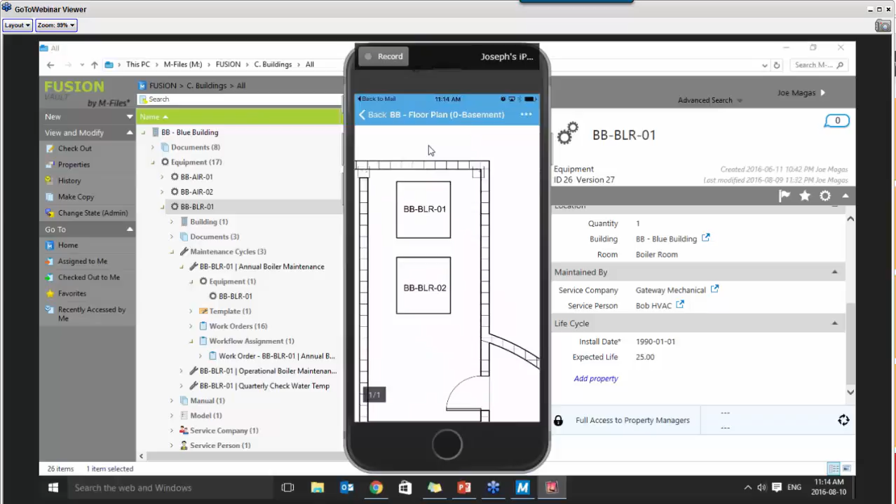We'll just take a look at this floor plan. We're going to look at this floor plan a couple different times. We can actually zoom in here, and there we go. So there's no question as to which unit is going to be supported. We can see the unit right there in the top of the building. The value of having all of this data available is that Bob HVAC has the information he needs to get the job done.

If we were to look in all views, just to take a little step aside, and we were to flip over to equipment, what we'll notice is these are the 4 pieces of equipment that Bob HVAC supports. So he has a listing of these, and as work orders get created, they will automatically be associated. Now we're just going to go back to our home. We can see that Bob, yes, in fact, does have one item assigned to him. We're going to click here on the work order.

If needed, a file could be added, for example, a picture, if some issue was there. But for the most part, this annual maintenance went very well. So I'm going to click up there. Oops, my apologies. I clicked on the wrong button. I'm going to click on Mark Completed, and I'm going to say, Done. All was well.

So now, within a few moments, this work order will be cleared off of Bob's desk. Sometimes it just takes a moment to cycle through that. We'll just give it another second here. We'll click on Assigned. There, all views. And we can see that, yes, in fact, this task is no longer assigned. It has been completed.

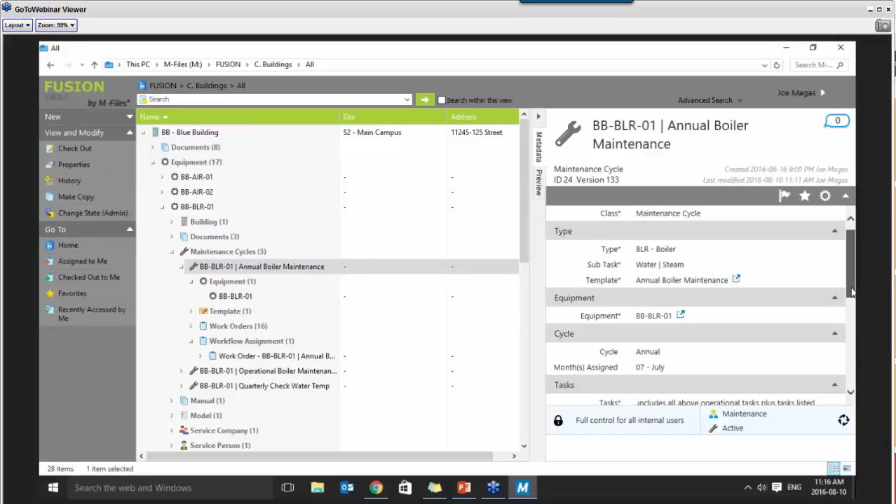So now if we were to go back to our equipment, find our equipment, and then find our maintenance workflow, we will find that the work order has been implemented. We'll just find this a different way to make it a little clearer.

Let's go back to our equipment, go here, maintenance cycle. We can find that this work order is now associated as a completed work order with the unit. Note the date has been updated to 2017. Because this is an annual task that needed to be completed, now it's been rescheduled for next July.

So full accountability and full traceability off of the fine work of Bob HVAC. That was the benefit or the application of this technology from the maintenance person's point of view. It allows him to perform his tasks with all the information he needs to get it done. If there's an issue, he has access to photographs and documentation that'll help him through that particular problem.

Now let's switch gears over to the property manager. The property manager in this case we can think of as the quarterback. He's responsible for a lot of different maintenance on a lot of different equipment, and he has to keep all these balls in the air without dropping.

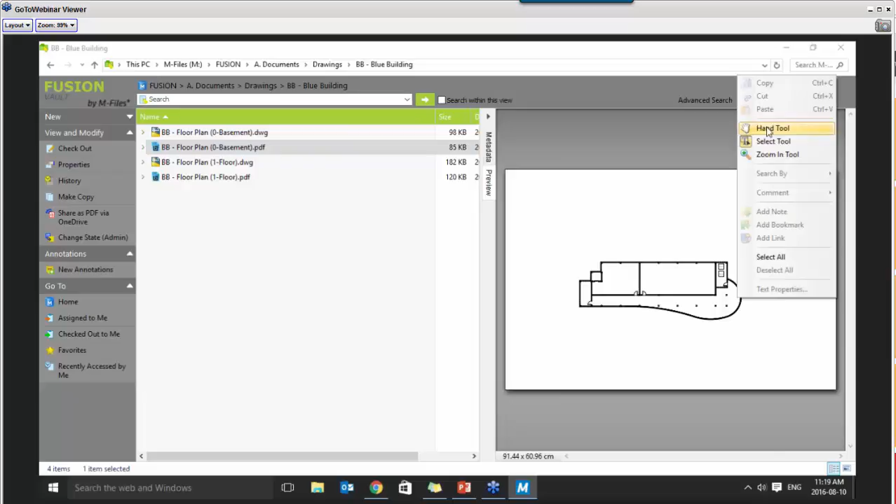He could link to the same floor plan, do a preview, and we can see he's able to locate this because the equipment's associated with it. Once he's in here, he can map it, he can actually look it up in reverse. We'll use our zooming tool here, go there. Now if I were to click on here, we have a hyperlink.

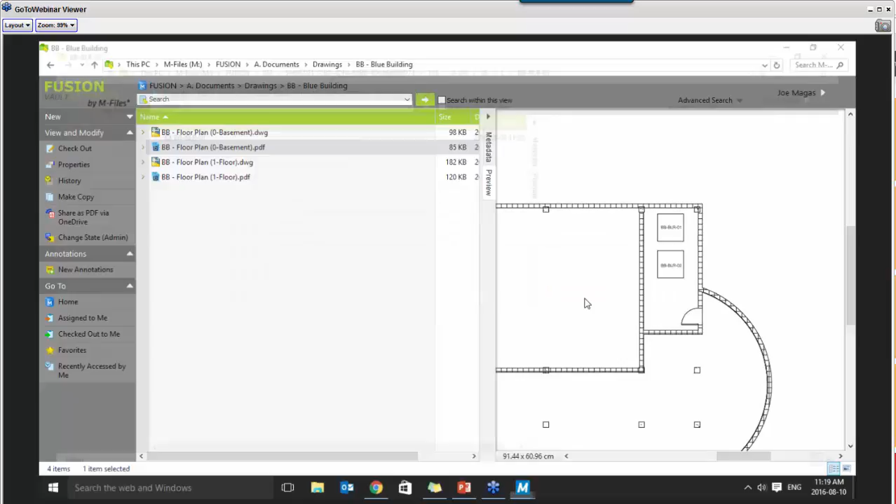This hyperlink will take you to the piece of equipment in question, doing a reverse lookup from the floor plan. Click on there, and there we go. Now from the floor plan, he is easily able to expand that, see the different maintenance cycles involved, the manual, who the service company is, service work, and the completed work orders for that. So his ability to find information, even if he's not in the building all the time, is greatly enhanced if he has this information stored.

Now let's talk a little bit more about these maintenance cycles, because that would be a key component of the work of our property manager. What we're going to do is take a look. If we look in our views, we can break up these maintenance cycles. We can say show me them by building, and this will show me all the maintenance cycles on that building. As well, we can say show me by building, and then by equipment.

So the dynamic nature of the folders in the M-Files platform is extraordinary. It allows us to query the information in a very specific way. Here are the maintenance cycles that are due in July for all of the buildings. Having the ability to navigate through this information, even through these simple views, is a real game changer for the property manager who needs to manage all these different pieces moving in his buildings.

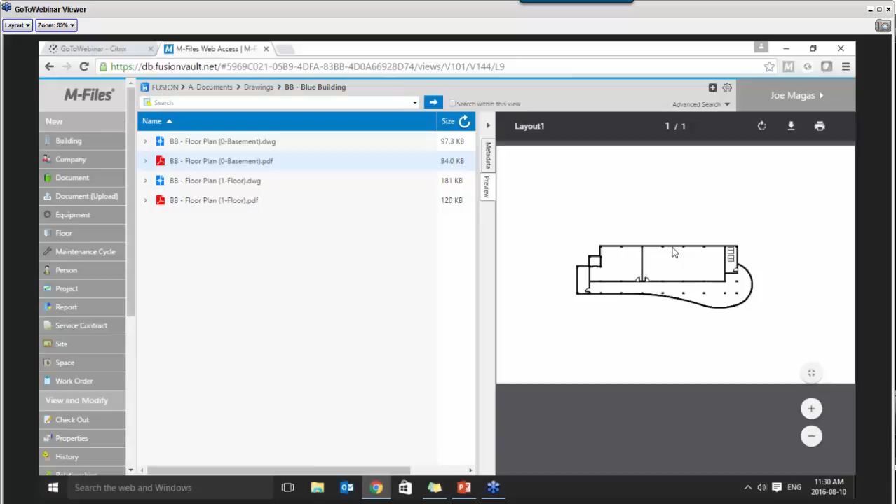Keep in mind we're still on the web version here, so it's very nice interaction. We're just going to go into Documents and Drawings, and we're going to find that floor plan. We had looked at this floor plan previously in our example. This is another floor plan here.

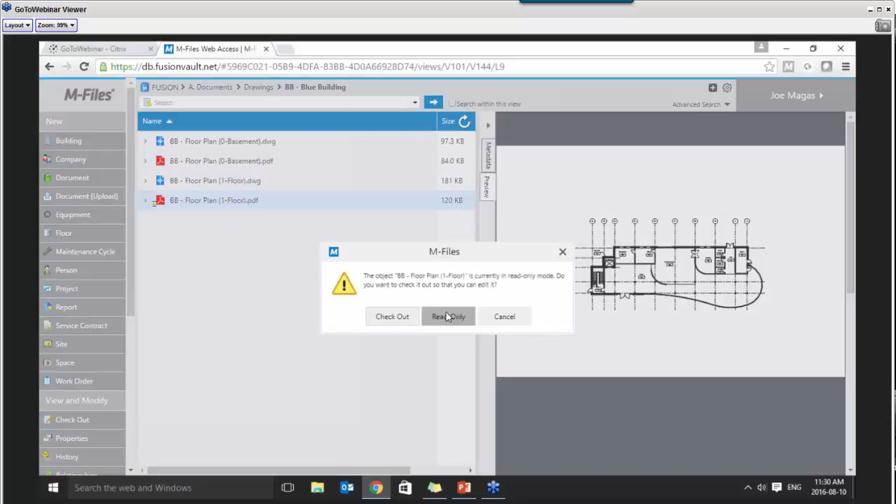So possibly our building owner wants to repurpose some of this space. How can we do this? Well, we're just going to double click on this file, and in this case we're going to open it in read only. Now this is a little bit of a transition here, because we store all of our data in Fusion Vault, but we use another piece of software.

We support it, we train people on software called Bluebeam PDF Revu. One of the real advantages of using Bluebeam for property management is that we're able to quickly measure areas and take measurements off of this to see if our plans for the future are viable.

For example, let's say there is a desire to repurpose our breakfast area and our kitchen, and perhaps use it as a coffee shop or a restaurant with doors to the outside for the public.

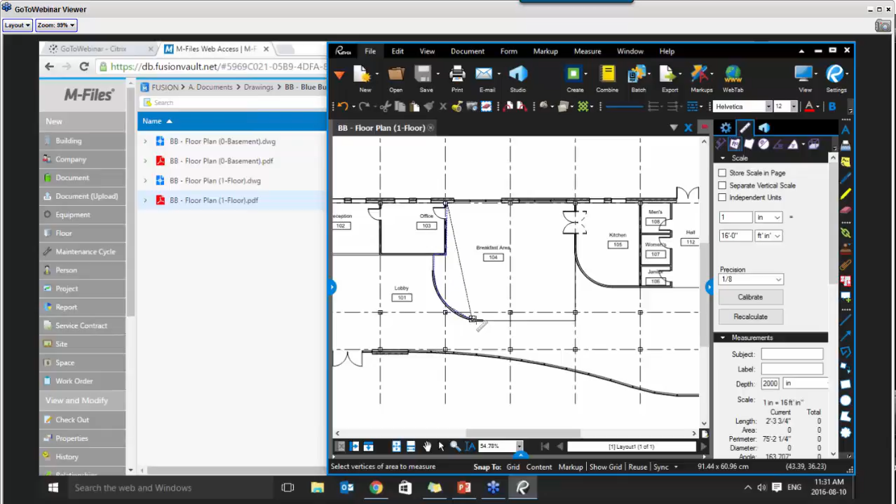Well, what we're able to do inside of Bluebeam is take a measurement, and I'm able to snap around. Now you can actually make curves for these measurements, but I'm not going to go through the trouble, and we're just going to snap around and take the whole area we're looking at, and hit enter.

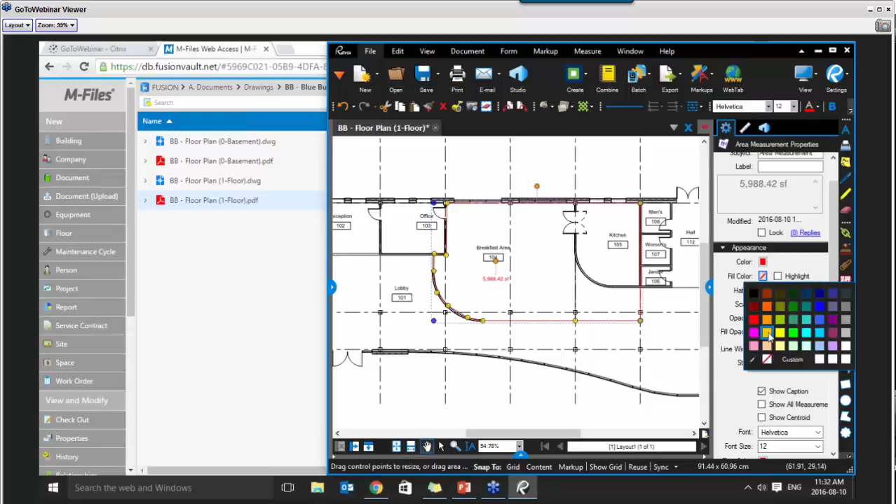Click on this, go to our fill, and we're just going to change our fill opacity. So we can see that this is nearly 6,000 square feet of area that could be repurposed.

Well, it turns out that that's a good amount for us to look at redeveloping the space, perhaps into space that we could rent out to a coffee shop or to some kind of outside-facing establishment.

So now a property manager or building owner would ask an architect or an interior designer to get involved with this project and say, could you make a layout for us? He could draw some information in here as to how he positioned the walls, going so on and so forth. But he's going to need a professional to lay this out in such a way that reflects exactly what he wants.

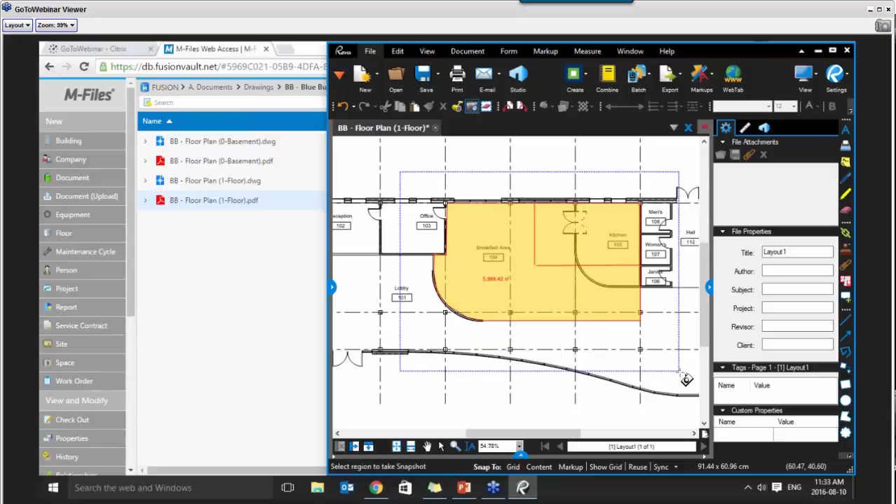So the first thing you can do is grab a snapshot of this, say okay this is the area I want, start into his email, and paste that. We grab that snapshot, flip over here to perhaps a Word document, and paste that in. Now he can communicate what he wants to accomplish in here.

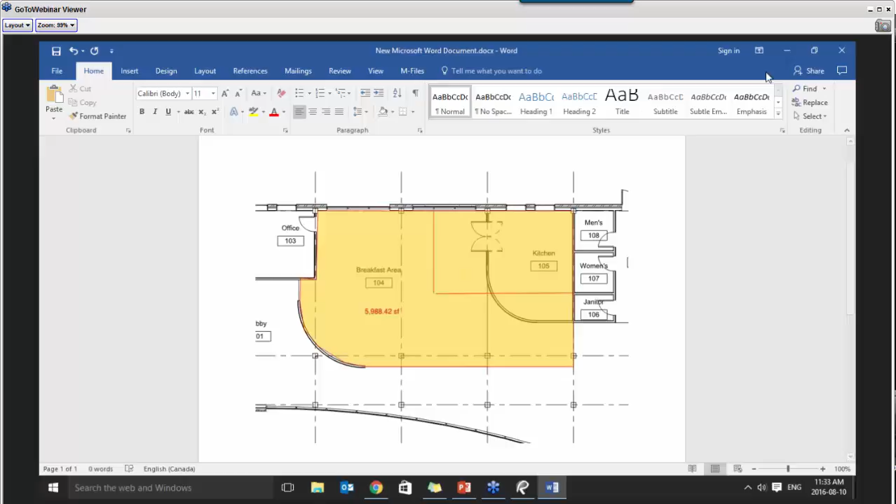But also, in this particular example of the Fusion Vault, we have access to our DWG file, which is an AutoCAD format. So he can grab this file format and share it as a public link, or just copy it out and email it to someone else. Keep in mind, he's accessing all of this data from a mobile application, and by having a compatible product such as Bluebeam, he's able to take very high-level information off of it.

So we can see from our demonstration here that regardless of our role as we develop and maintain our properties, having this information available to us, the right information, saves us time, saves us money, and helps us get our job done with less stress.

So just to wrap up here, what we're going to do is flip back to our PowerPoint, minimize that, and summarize our solution.

We provide Fusion Vault as an on-premise or hosted solution to companies wishing to maintain their data. We also are a reseller of Bluebeam PDF Revu software, which is good software to use in conjunction with Fusion Vault, helping us leverage the value of our floor plans. Now, many property managers may not even have a floor plan. Perhaps your staff doesn't have a version of AutoCAD or similar software to create those floor plans. So we offer the service of helping companies implement those floor plans.